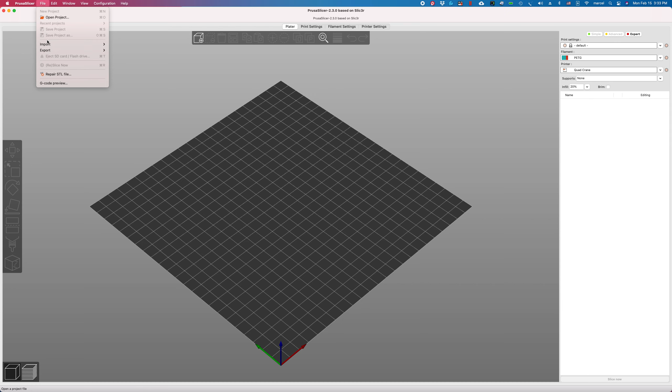I set up a Quad Crane as an initial printer to use, but it's only set up with a single extruder and basic filament settings. Nothing really on the plater, nothing really defined accurately here, but that's because I've got it all on a profile. So now what I'm going to do is import my config bundle, PrusaSlicer config bundle multi-tool color.ini, just a simple name.

Presets were imported. Now you've got some extra things. One is you can notice the wipe tower. You also see that you've got filaments here of a bunch of different colors, 8 different colors, and each one of these represents an extruder. So we go back to printer settings here, and you can see we've set up this printer here. We've got a physical printer that's a Quad Crane with CMYK colors.

There are 8 extruders defined right here. It's RepRap/firmware for the G-code flavor. I've told it to use relative E distances and firmware retraction, because I like using firmware retraction. This profile's been set up for that, and supports variable layer heights.

So now the way this works is all these extruders here are created, and each is set up as a different color. This is primarily so you can select a different color when you assign it to an object on the screen, like this. And I've got 8 of them set up initially on here. You can add more, but it's a bit of a pain, a lot more work to add the extra colors, but I can show you how to do that too.

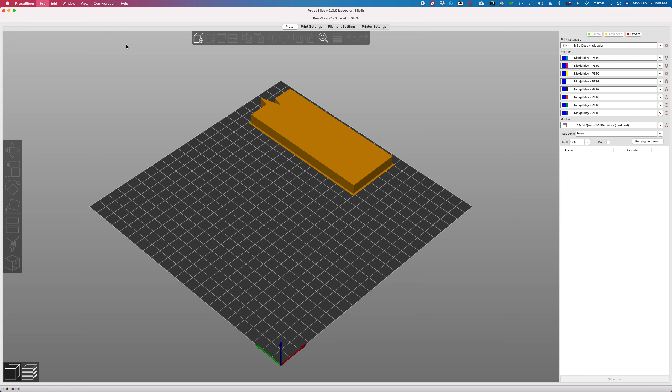So now we'll go back to the plater and let's see what we can do to use it. What I'm going to do is import an STL file. Let's see, we'll try the clownfish.

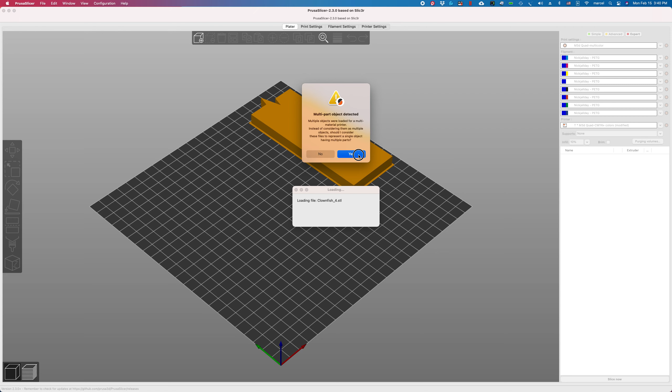And we want everything except the supports. And it says multi-part object, so yeah, keep them all as parts because they stick them all together like this.

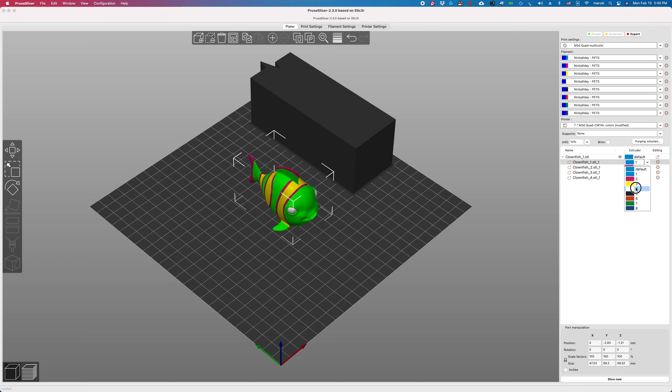Now we can go through, and on the right hand side you can see here where you can change the colors. So we've got the default color here for this one, it highlights in green on the display. Right click that, I don't want that to be green, I want that to be white. So we'll set that.

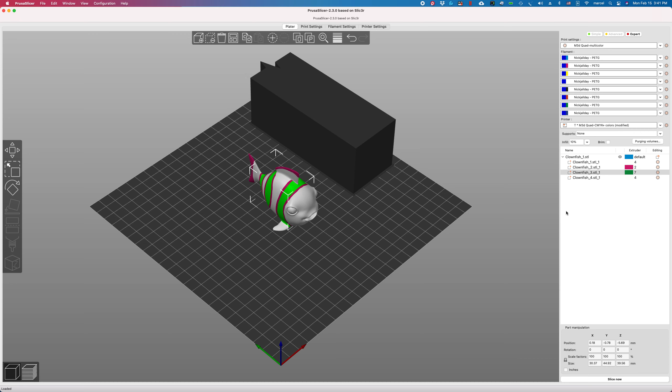Yellow and red, yeah, I guess those would be okay. That's not bad. But if I really wanted to, I could do red and green instead of the yellow, so let's try that. Okay, so it would be dark green.

Now the purging volume here, you can see this huge purging amount here. I try to avoid using that. Go to adjust your purging amounts, you have to type in values because there's a bug in PrusaSlicer. So I'm going to minimize that by typing in new values.

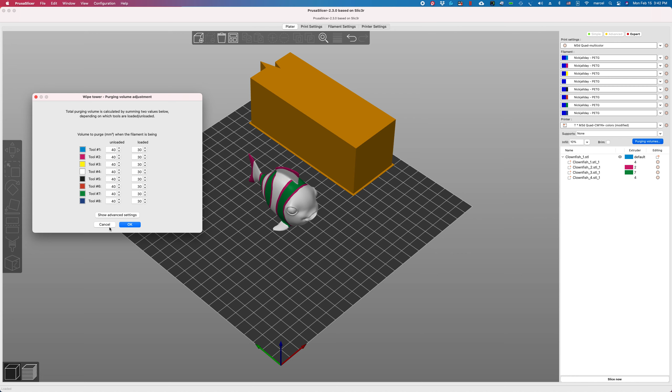Make this half of what it would normally be. Now it's not using all the colors, so it'll not actually be as large as you see here. Actually, why don't we cancel this, and what we'll do is we'll just slice it now and see what happens, because it'll tell us how big the purging tower is really going to be. So it's not that big, we'll leave it that way.

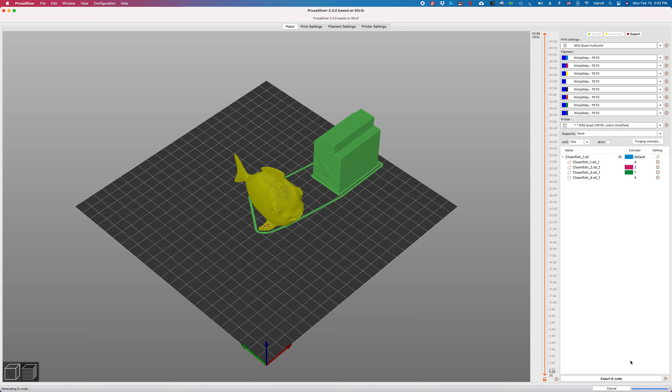So it's going off and it's finishing generating the G-code, and when it's finished you'll be able to see what it looks like. There we go. So all set up, ready to go, ready to print.

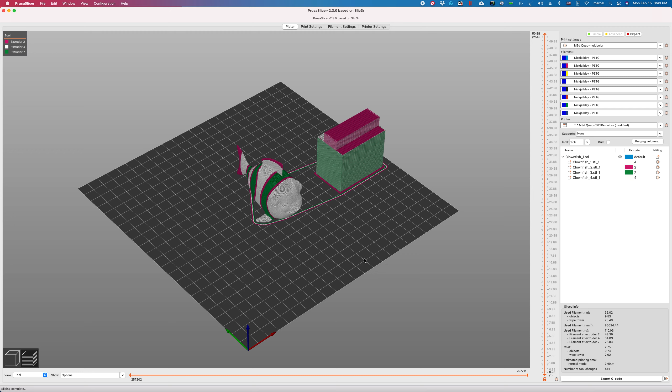Now we just export this and send it off to the printer, and you can see what it does. And that's about it.

Oh, if you want to, in the more advanced stage, if you want to add additional extruders and different additional colors, you go back to General here. Let's say you can add an extra extruder here, make it 9. You'll wind up with 1 extra extruder.

And in the model, I don't know where it put it. Did it do it at number 7? Nope. So 9 here is now set to the default color, and we can change that one.

And then we go to custom G-code, you'll have to add a new entry in here. Copy this and make it P8. Add firmware retractions, copy this last line, make it P8. And this one here, copy this line and paste it and make it P8.

All the rest of the stuff is the same. Want to remove the extra 2 when we're done, so this one's in reverse, so copy this first one here, paste it above and make it P8. Down in this one here, we add a new color, so we copy this last line and make it P8, set it to be whatever we like.